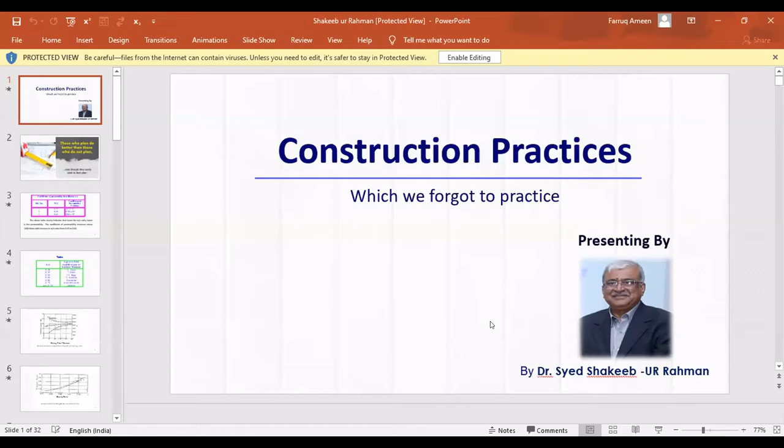So I was just saying, we sometimes plan. Those who plan certainly do better than those who do not plan. And most of the time, even though we plan, we do not stick to our own planning. So friends, let me start with the concrete.

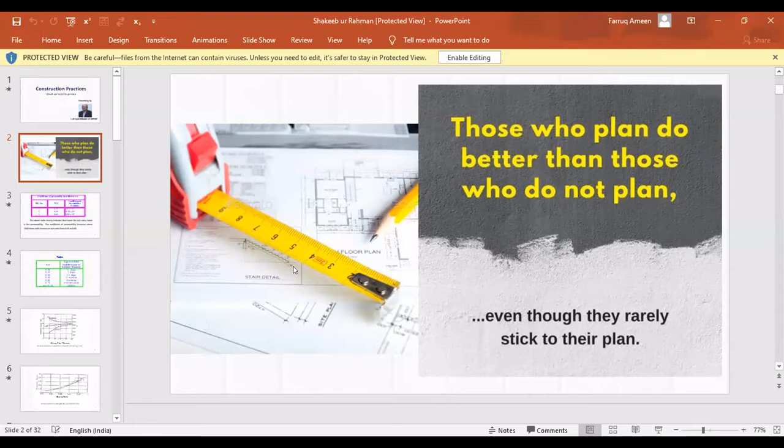See, generally, concrete is referred to as M15 grade of concrete, M20 grade of concrete, M25 grade of concrete, M30 grade of concrete, and so on. The grade of concrete can go even beyond 100 grade. So I will be mostly sticking to the normal grade of concrete we adopt in practice. And my lecture is for the constructions which may not have a quality supervisor.

It can be our own buildings where we may not have a technical supervisor to supervise the construction. In such a case, what precautions we should be taking so that finally we end up with a quality construction, without or with minimum problems later on during its service period.

Friends, we refer to, as I said, say an M15 grade of concrete, M20 grade of concrete, etc. And then we also say it is 1:2:4 concrete, 1:1.5:3 concrete. So that means, we adhere to what is 1:2:4 concrete. It is 1 part of cement to 2 parts of sand to 4 parts of jelly, which refers to M15 grade of concrete. This M15 grade of concrete was considered as a structural concrete up to the year 2000,

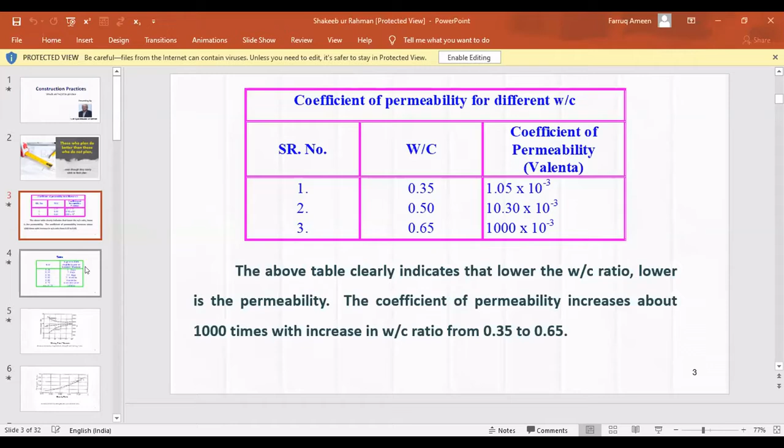In fact, a good practice is to go for a design mix with weigh batching. But in 90 to 95% of our construction, we do not go for weigh batching, we go for volumetric batching. It's fine. There is absolutely no problem. We can still go by volumetric batching. So now when I say that M20 grade of concrete is 1:1.5:3, I am only specifying the ingredients: 1 part cement, 1.5 parts sand, and 3 parts of coarse aggregate, that is jelly.

But I want to emphasize at this point of time that these are not the only 3 ingredients going into concrete. There is another, fourth, very important, underline fourth very important ingredient, which is water. Now, in our proportions, we have just not bothered to mention how much quantity of water should be going into mixing of the concrete. So when we say 1:1.5:3, the amount of water is not generally expressed.

The quantity of water that has to go into concrete plays a very significant role. The more water than required, the strength ultimately will be less. Then the concrete can lead to a very porous concrete, where the pores will be left without getting filled up on their own. And therefore, I want to explain the importance of the quantity of water which should be mixed with concrete. Now, for that matter, there is a term which we call the water cement ratio, W/C ratio.

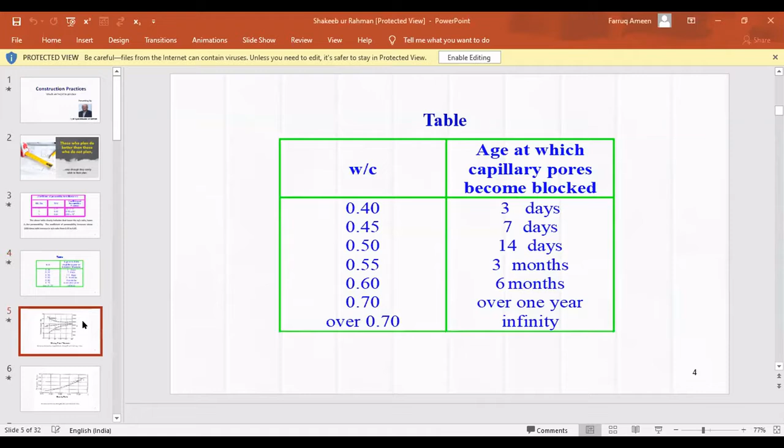For the same ingredients, if this mixing time is not properly maintained, then we can see variations in the grade of concrete. For example, here is the mixing time in seconds. If we mix for about 90 to 100 seconds, say 1.5 minutes, after the last part of the ingredient has gone into the mixer, then we get a very consistent and good quality concrete. Supposing the drum is rotated only for about 30 to 50 seconds and then unloaded, then in the same bulk of concrete, we may have some parts showing very high strength and some parts very low strength. That means the concrete we get is not consistent in strength.

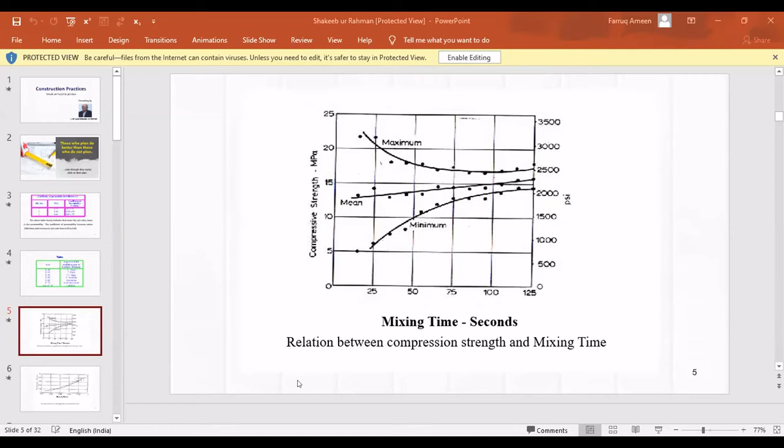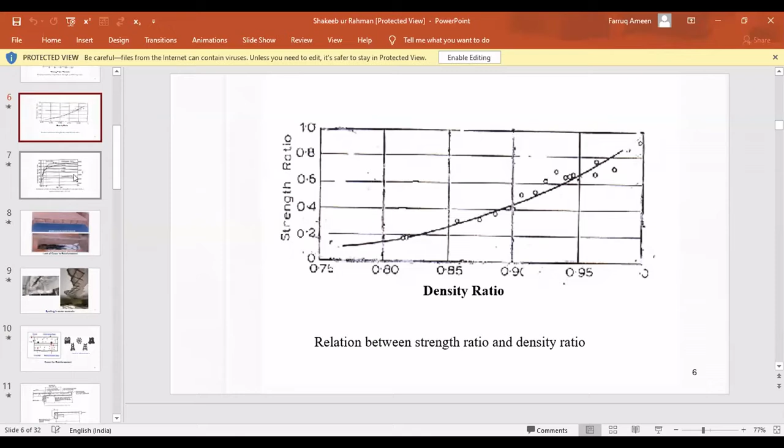Next slide, please. Yeah. So once we place the concrete, here I want to tell you one thing. See, when you are placing the concrete, remember there is already reinforcement placed in position. And before placing the concrete, you should make sure that there is proper cover below the steel for the concrete to go and sit. I will be showing you in my next slides what will happen if you do not maintain a proper cover. Cover should be proper. There are values. For example, in a slab, we should have a minimum of 3/4 inch cover. In columns and beams, we should have a minimum of 1 inch cover, and so on.

This cover should be properly maintained. And the concrete that should be going in the cover should be very, very dense. I'm going to explain to you in my next few slides what happens if we do not have a good, dense concrete cover below the reinforcement. So after taking care, we lay the concrete, we leave the concrete to set. And now the question is, when should we start curing our concrete? This is a very important question. And I will simply say there is nothing like a thumb rule for you to say that you start curing now. You should, after laying the concrete, be observing.

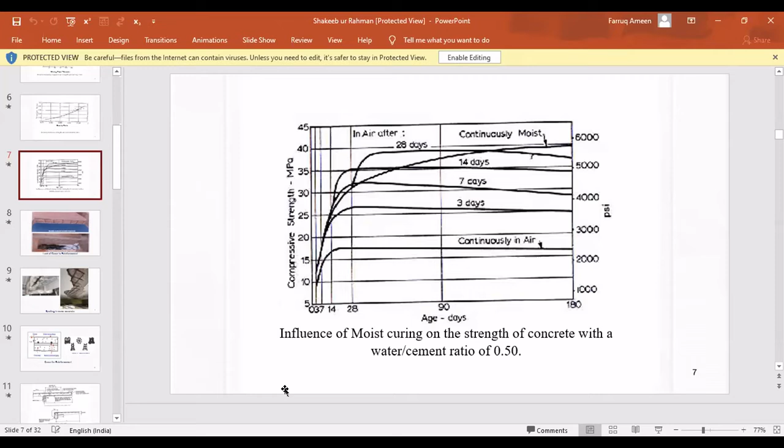Yes, I was telling you about the cover, the amount of cover, and also the quality of cover. I said, for slab, at least about 3/4 of an inch cover should be there. For lintels, another 3/4 of an inch to 1 inch cover should be there. For beams and columns, minimum cover should be 1 inch, and so on. And the quality of cover should be sufficiently dense. Otherwise, what happens is what you see here.

At this point of time, I always remember, our civil engineering group, some of our civil engineers and practicing engineers here who are present. I see Farruq Ameen. Yeah, some will appreciate my point. I always remember one late, great engineer, Dr. C.S. Vishwanath. He used to tell one thing. Maybe, if you permit me, I will tell that example in Urdu, which you will enjoy.

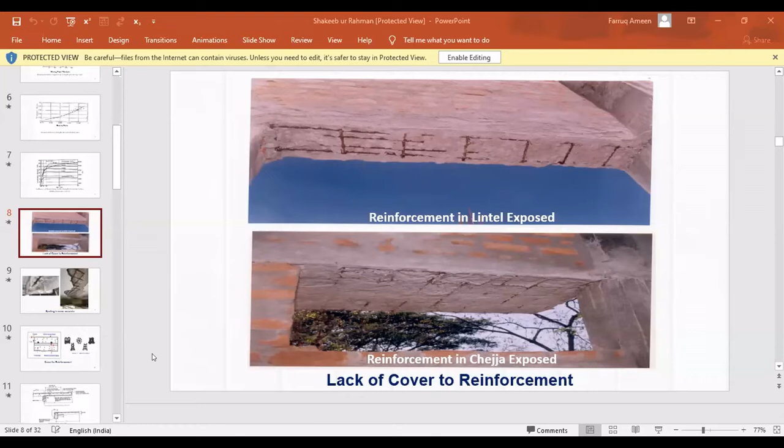So friends, here again, I want to emphasize two things. Before placing the concrete on the reinforcement, we should ensure that the reinforcement has a cover. I will show you some cover blocks. They are all available in the market. They should be brought and kept below the reinforcement before the concrete is poured in. Yeah, next slide, please.

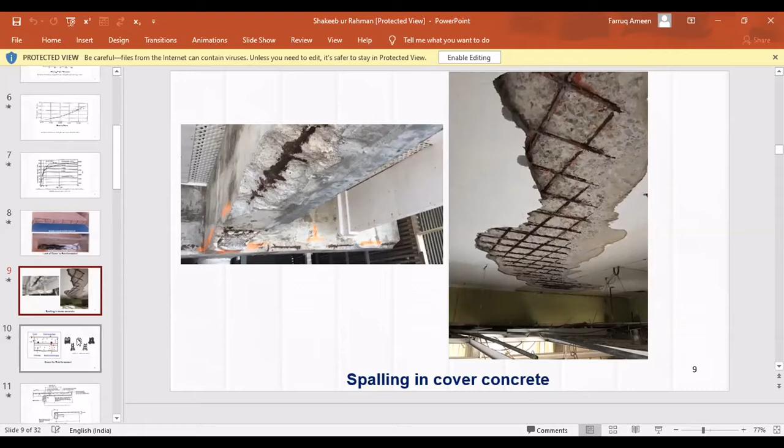Yeah, you see, these are some of the pictures. This is the spalling of the cover concrete. This will happen if the quality of cover concrete is not proper. Yeah, next slide, please. So in order to avoid that, first of all, our concrete should be a quality concrete. Number two, cover blocks for reinforcement are available in the market. So before we pour concrete, we should ensure that the cover blocks are placed and they are not disturbed.

Friends, the main problem is this. Even if there is technical support on site, and our technical person visits the site a day before the concreting, he may be totally satisfied and say that yes, the reinforcement has been placed, proper cover has been placed, etc. But that is not enough. At the time of casting the concrete, there will be a lot of movement on the reinforcement, and that may disturb the cover which you have given. So extra care should be taken at the time of placing concrete to see that the cover blocks which were placed a day before remain in position during concreting. These are all very simple things, we should only remember and adopt in practice. Yes, next slide, please.

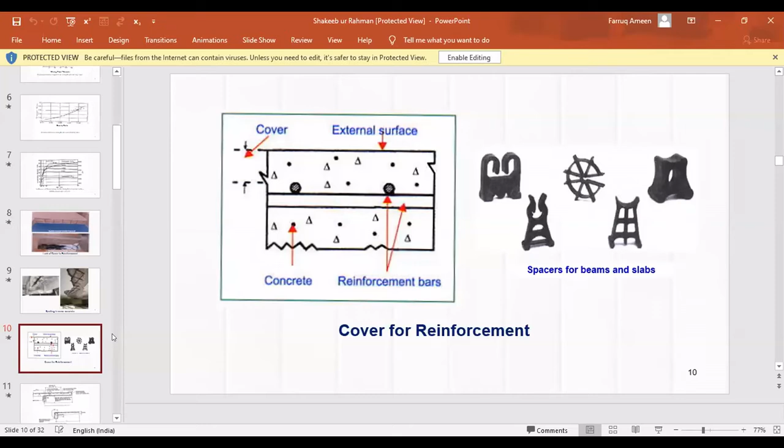Yes. Now I am coming to the reinforcement. See, there is a saying, which may not in fact be correct in many cases. There is a tendency in construction to steal cement, but nobody steals the steel. You got my point? There is some tendency of reducing the quantity of cement at the time of mixing and saving cement, etc. But in general, I will say in 90% of constructions, the steel we normally provide will be more than the required quantity of steel if you go by design.

And more than the quantity of steel, what is important is the detailing part of steel. By detailing, I refer to how steel should be placed before it is embedded into the concrete. Placing of steel is referred to as detailing of steel. I will give you a simple example here. The simplest structural element in a building is a Chejja, which can be about 1.5 feet to 2 feet in width. Now, how do we place reinforcement in a Chejja? This is how we should be placing the reinforcement in a Chejja.

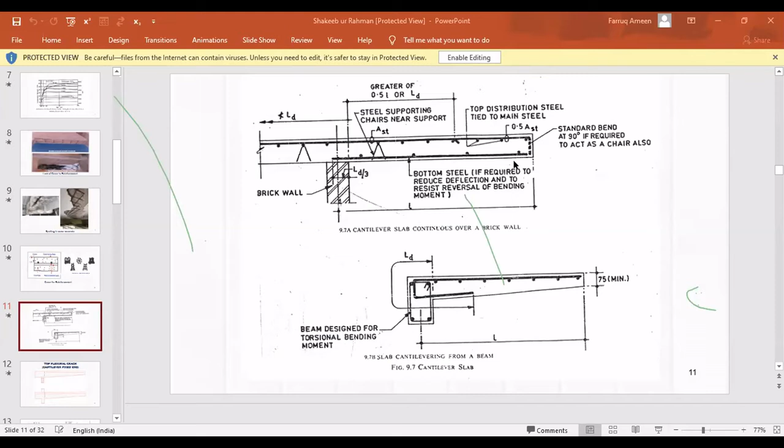Mr. Mobin, can you mute, please? Hello. Mr. Mobin, can you mute your microphone? Please continue, Dr. Saab. Next slide, please. Excuse me, sir, there's an option that you can mute all the participants, and then you can proceed. Yes, that is better, I think, because there's a lot of disturbance. Please continue. I have muted all the participants, but they are unmuting themselves. Okay, good.

Now, you see, this is what I was telling. If there is a cantilever portion, the reinforcement should be at the top, and concrete should be at the bottom. If you do not do this, then you see the kind of crack shown here at the fixed end of the cantilever. It is bound to crack if the reinforcement is not at the top. It is very simple. Consider this as the cantilever. When loads come on the cantilever, it bends like this. Where is the tension and where is the compression? The tension is at the top, and therefore the reinforcement, to cater to the tension, should be at the top. If by mistake it is laid at the bottom, the tension will be in the concrete portion. Concrete is weak in tension, and therefore the concrete cracks here.

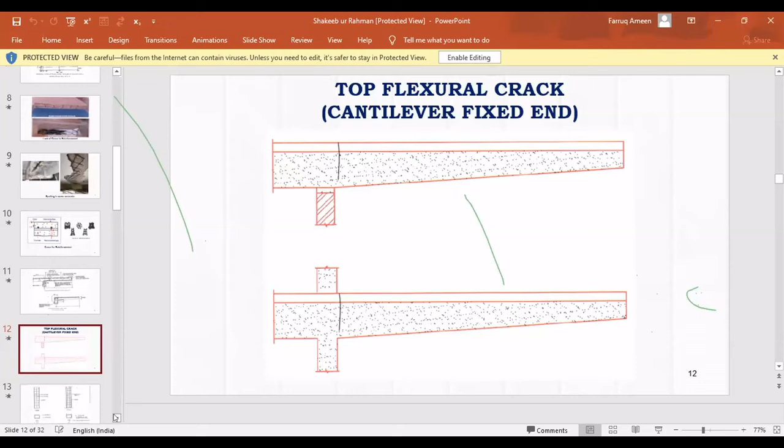Next slide, please. Yes.

Friends, about 10, 15 years back, we used to get only one grade of steel in the market. Now it is very common. We have Fe40, that means 40 grade of steel, 50 grade, and also 55 grade of steel. We must be aware that there are different grades of steel available in the market. My point is, whatever grade of steel you have used in the beginning, you should continue to use the same grade till that structural element is completed. For example, if the columns were started with Fe40 grade of steel, then complete the building only with Fe40. If there is an extension of the building, you can change the grade of steel. There is no problem. But in one particular structural element, it is not a good practice to mix different grades of steel.

Sometimes, you should not think that for the main reinforcement I can go for a higher grade of steel, and for the minor reinforcement in the form of stirrups, etc., a lower grade of steel. No, don't do that also. In one element, the grade of steel should be the same. Now, let me tell you, about 10 years back, there used to be a lot of price difference between Fe40 grade of steel and Fe50 grade of steel. Now the difference is not there.

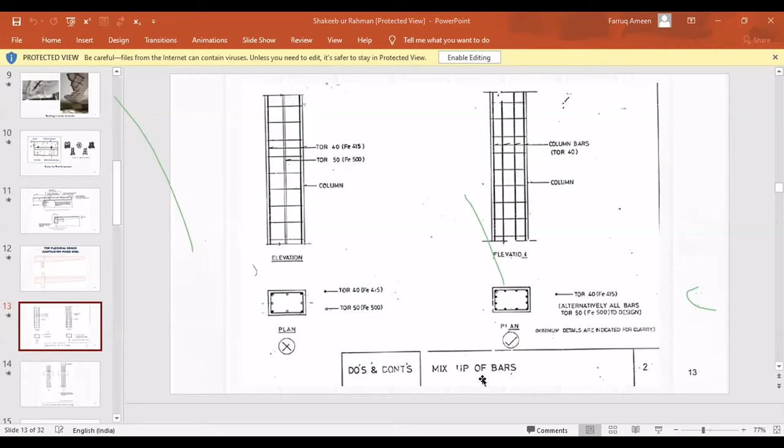Maybe a time will come in future very soon when you will find only Fe50 and Fe55 grade of steel in market. There may not be any Fe40 grade of steel. Now, at the moment, the price difference between a 40 grade of steel and 50 grade of steel is not appreciable. And therefore, if you so desire, you can always go for a higher grade of steel. And by adopting higher grade of steel, there is saving in the cost of steel to an extent of 10 to 15%, depending upon whether your member is a flexural member or a compression member. Yes, next slide, please.

Yes, see another important aspect. I told you in the beginning, I'm not going to show you anything which we are not practicing. Sometimes we forget to practice. Okay, you should always remember. See, at the roof level, there is a beam column junction. There is a column, there is a beam, there is a slab. Okay, and the column rods will have to come. And the column rod should not be stopped at the roof level. It should go above that roof if there is further extension of the building. And the rods, as far as possible, should be staggered. They should not be of the same length, which extends above.

Now, if this is not done, by any chance, if all the rods are cut above the roof level, but they are all cut at different levels, then it is not a very big issue. What you should be doing is, in such a case, you will be placing that stirrup at a distance of, say, about 8 inches center to center. On the other hand, if just above the junction all the rods are cut at the same level, then you reduce the spacing of these stirrups to 1/2. This is not a good practice, but still if you have done it, then reduce the spacing of the stirrups to 1/2, that is 4 inches center to center. Yeah. Next slide, please.

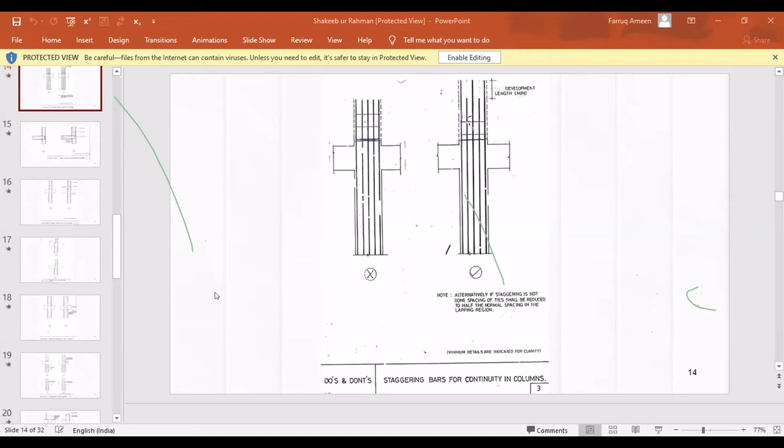Yes. See, these beam column junctions are very important. As I told you, number one, you should not stop the bars to get cut at the roof level. By doing so, what will happen? You will have to start lapping the bars from the junction. Now, if you do so, there will be a lot of congestion of steel there, and you cannot pour concrete and compact that concrete properly. See the importance, I will be taking you through the importance of a good quality concrete and proper detailing at the junctions, particularly when there are some heavy wind loads or earthquake loads. During wind loads and earthquake loads, generally the structure fails at joints like this. Therefore, a joint should be properly detailed before concrete is poured.

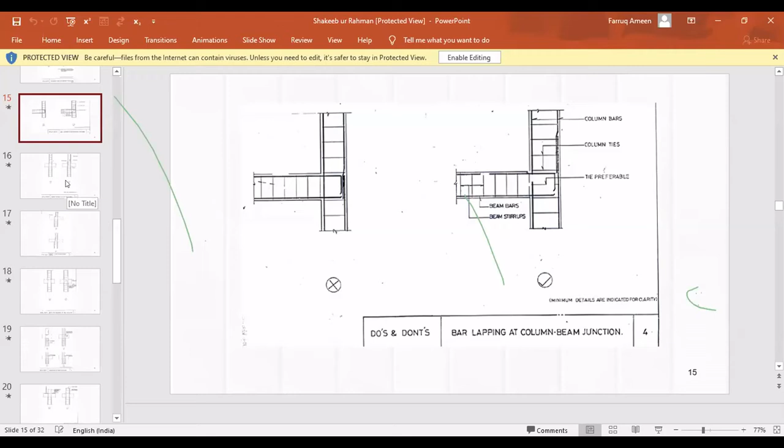And next slide, I will show you. So here, what I want to say is, when you are projecting your bars, see that the bars in one particular story will not stop at the beam column junction. They should go above the beam column junction for a minimum length of 50 times the diameter of the bar, so that for the next story, the rods will be lapped within that development length, which is 50 times to 60 times the diameter. Or even, you can project those rods for about half the height of the story or whatever.

Yes. Now, sometimes, in multi-story buildings, we will have to change the size of the column, because for a 5-story, 6-story, 8-story buildings, maybe first 2-3 stories, we may maintain a certain size of the column. And because as we go above, as the load considerably gets reduced, then sometimes we may think of reducing the column size, or it can be for some other practical purpose also. That is permitted. You see, the column size in one floor can be something, and in another floor or subsequent floors, the column size can be reduced. It is permitted by code. By codal practice, it is permitted.

But when you intend to do that, you should have a plan. What is that plan you should have? You have a certain size of the column below. You have decided about a certain other size above. Therefore, for this size, you cut the stirrups for that particular size of the column, and then have them. Then for the reduced column size, you reduce the size of the stirrups, keep it ready, and then from the bottom of this beam column junction or the slab level, you should kink the bar from the bottom of the slab gradually and take it above, and then place the stirrups and place the rods in position, and then only concrete this beam column junction and the slab.

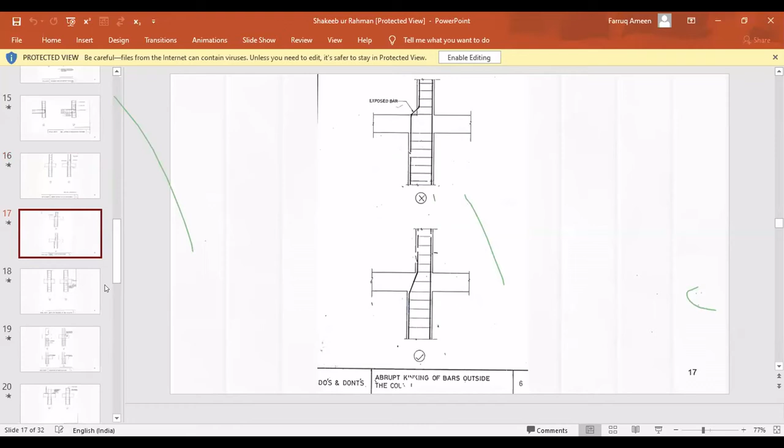Yes, I was telling you that whenever there is a lateral load, maybe due to wind, maybe due to earthquake or whatever, your beam column junction plays a very important role. We have seen some pictures after failure of structures. For example, in 2001 or so, which I'm going to show you some slides of also, there was a very serious earthquake in Gujarat, and so many multi-storied buildings collapsed.

We found that the buildings which were designed with excessive reinforcement than required, but with improper detailing, failed. But buildings with just sufficient reinforcement, but perfectly detailed, did not fail after the earthquake. They sustained that earthquake. It is because the joints there were perfectly designed and detailed.

Now generally what happens is, the problem is, whether we want or not, the labor group, for example, the mason. If you ask the mason, I want stirrups to be provided at the beam column junction, he'll put up a lot of resistance. He says, no sir, I cannot provide. But you have to make sure that the stirrups are continuous either in the column or in the beam.

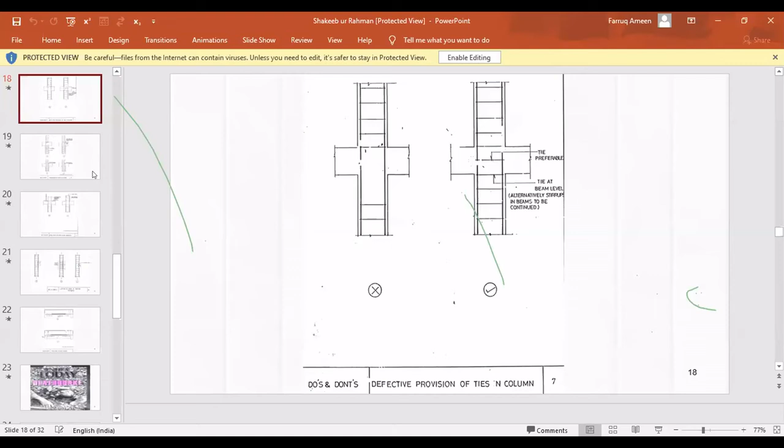Again, this is also about the discontinuity of the rods. Sometimes what happens, we take the building up to a certain number of stories, and then we stop the construction temporarily. And this temporary period can be for a few months, or for a few years, or it can be an indefinite period. Therefore, when we have to stop the construction for whatever period of time, we should see that the rods exposed above the building are properly placed in position.

It is a common practice. We have seen that there will be dummy columns constructed to keep the rods safe there. You should see that even that dummy column will not allow the water to go inside and make the reinforcement corroded. Whatever we have to do, we have to safeguard that reinforcement. If we leave the reinforcement just like that, particularly in public buildings, say in Kalyan Mantaps or even in schools, where children have access to the roof slab, they may play with the reinforcement, and the reinforcement sometimes may not be there at all. This is not something uncommon. This is quite common.

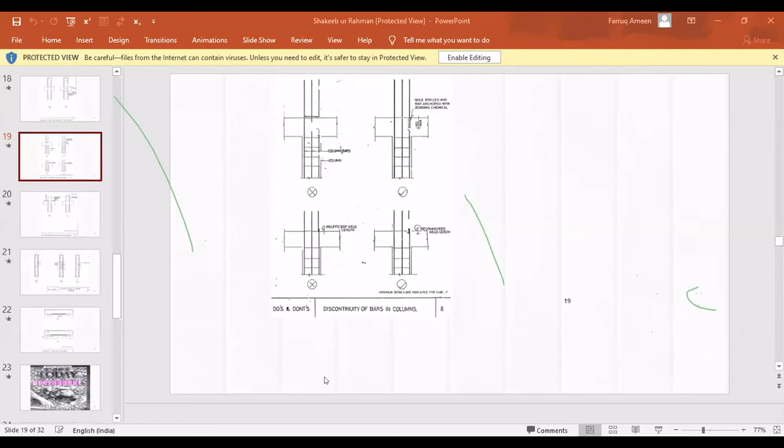Supposing there were 6 rods in the column and 2 are missing. Then what do you do? Because you have already cast that slab. So for that, what we can do is make a small hole there and take the reinforcement from there. And then we have adhesives, and keep this rod, which has been inserted now, completely buried in adhesives, and it's safeguarded. Next. Next slide, please. Yes, next slide.

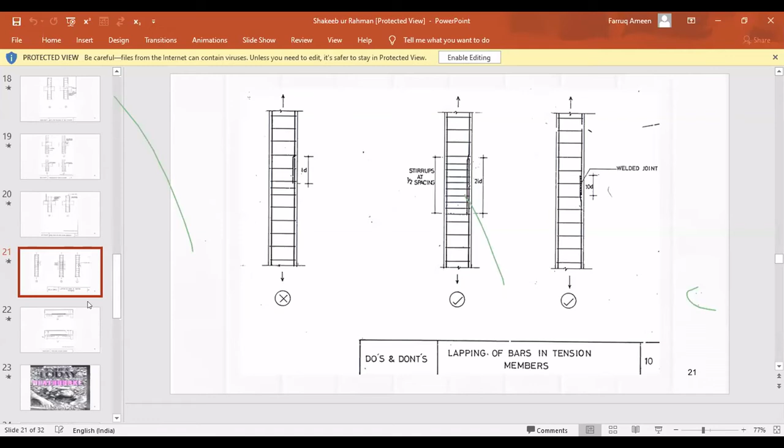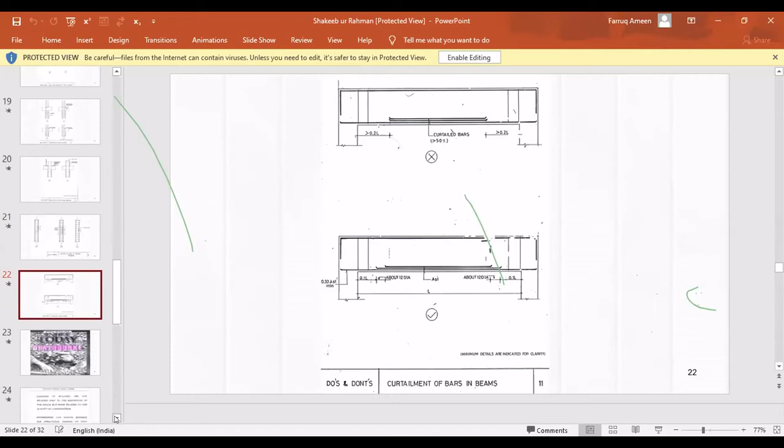Yes. Now in our beam members, it is generally seen that for the size of the cross section of the beam, we may not be in a position to put the complete reinforcement in a single layer of the beam. Then the code permits you to adopt multiple layers, like what we are showing here. So the first layer of reinforcement should be continuous. It should go and support over the columns or the wall, whatever it is. The second row can be curtailed, and the length of the bar in the second row can be 80% of the span. Subsequently, you can further curtail and put the third row of the bars. So when you are putting the bars in different layers, they should be curtailed properly and placed in position.

It should not be that all rods are curtailed at one single point and then placed like this. What will happen compared to this? In this case, there will be a stress concentration at the point where there is only, say, 30% reinforcement to the point where there is 100% reinforcement. In order to avoid that, you should stagger the bars and see that there is no stress concentration at a particular point. Next slide, please.

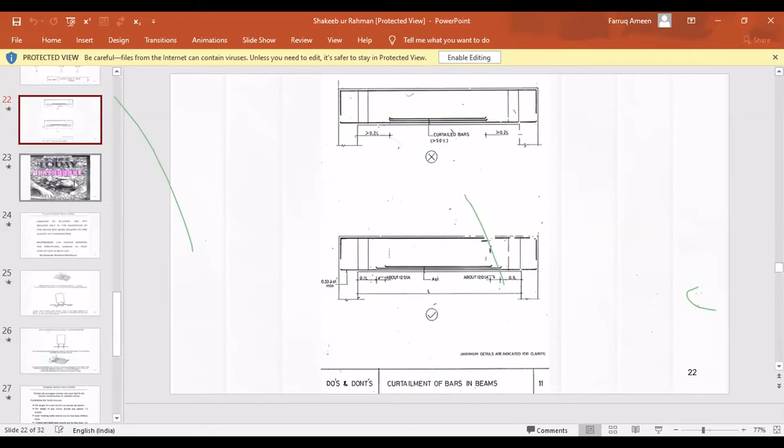Yes. Now I'll very briefly, with the permission of Farruq Ameen Saab, can I take another 10 minutes? Yes, sir. I can't hear you. I will take it as I am permitted. Hello? Hello? Yes, sir. Please continue.

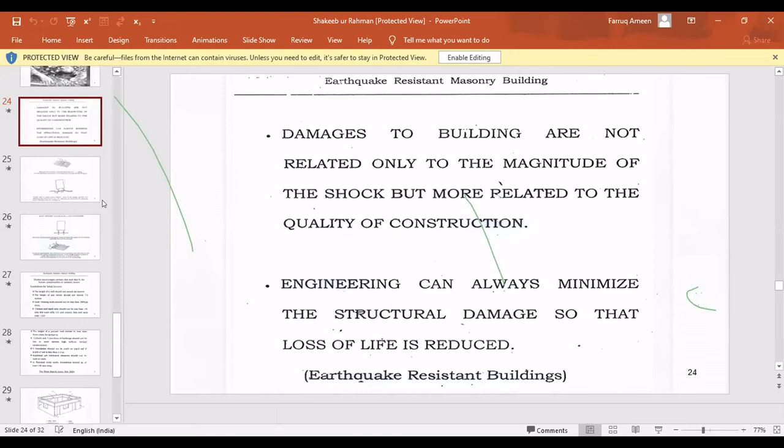I don't remember where I had read. It said an earthquake-resistant building is one which allows the occupants to rush out of the building to see how their building is crashing. Yes, next slide, please. Now, the damages to buildings are not related only to the magnitude of the shock, but more related to the quality of construction. This is what I'm telling you. We should not give any excuses that the building collapsed and so many people died because of the high intensity of earthquake. No. We will be knowing beforehand which areas are prone to what intensity of earthquake. Beforehand we have the information, and therefore when we design a building, we should take care and design the building for that particular region. Engineering can always minimize the structural damage so that the loss of life is reduced. This is what is called earthquake-resistant buildings.

And therefore, buildings in earthquake-prone areas should be designed accordingly. Zones have been divided: earthquake zone 2, zone 3, zone 4. We in Karnataka come under earthquake zone 2. After the 1991 earthquake and the 2001 earthquake, zone 1 was simply scrapped. We started with zone 2. There is no zone 1 now. We have only zone 2, zone 3, zone 4, etc. So we are in zone 2, which is quite a safe zone.

But even in our zone, when we design a multi-story building, we should design considering the earthquake forces which come in zone 2. So this is what happens in the event of an earthquake: due to the horizontal forces induced in the earth, which can lead to collapse of the building or serious cracks in the building depending upon the intensity of the earthquake. Next slide, please.

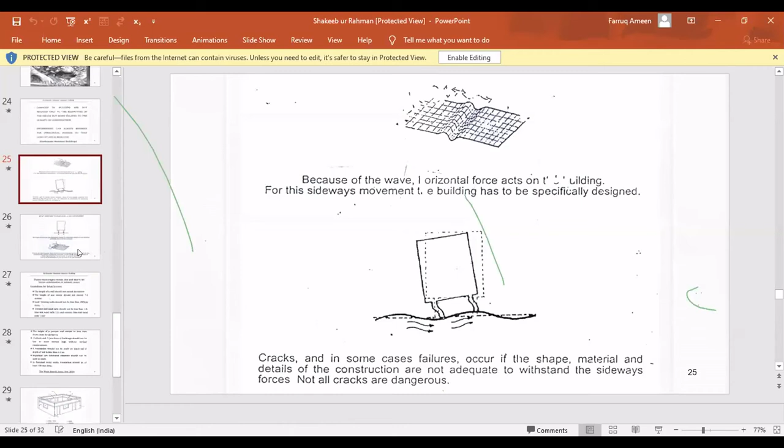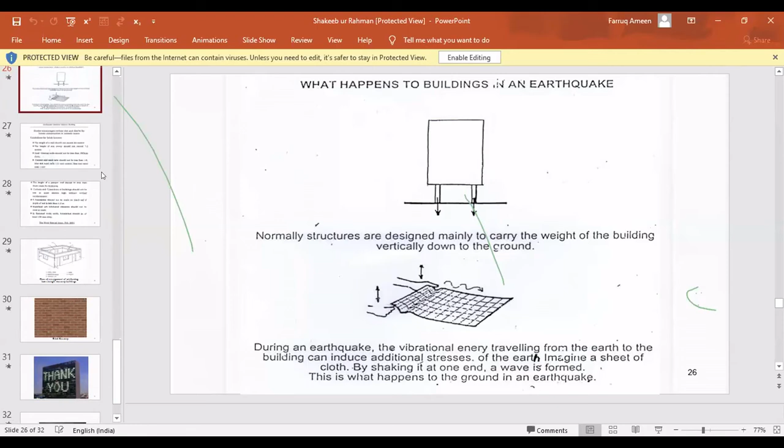Yes. So now, maybe the last slide or so, I'm going to take you through a few guidelines which, again in 2001, HUDCO had given: certain do's and don'ts for house construction in seismic zones. What I want to emphasize with this slide is that there is nothing new which we are not following. Most of the things said there, all of us are following in our masonry structures, in our constructions. But we have to ensure that they are properly done by our construction team. There is nothing new. Almost all the guidelines given there are adopted in our practice.

Therefore, our masonry structures, what we are constructing today, with a little care, can be made earthquake resistant. I'm not going through the multi-storied buildings or the detailing of columns, beams, etc. Now here I'll take you through every point. You can take it as a checklist and mark it if we are following. Almost all the points we are following. There will be 1 or 2 points sometimes we may not be following. And if we follow them henceforth, our masonry structures can all be taken as earthquake resistant structures.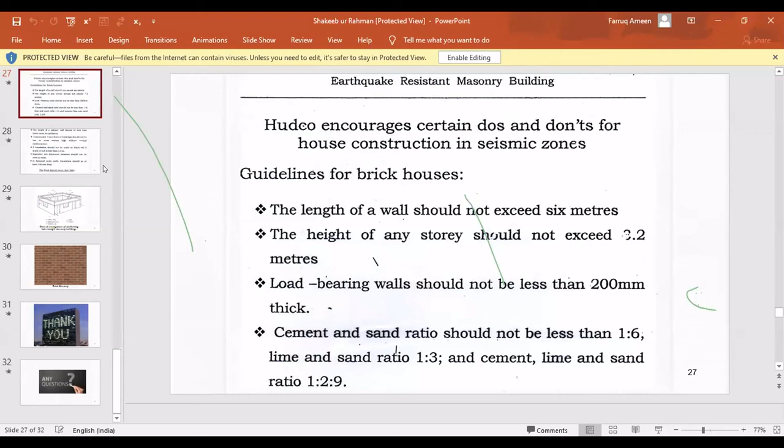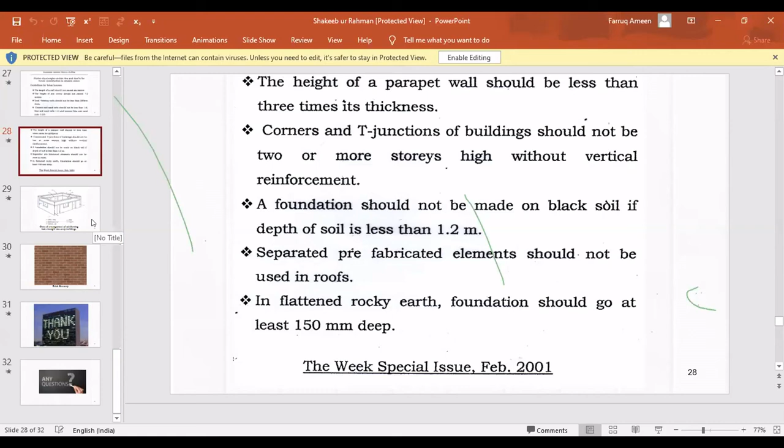Yeah. I think I have come to the end of my lecture. This is the last slide, perhaps.

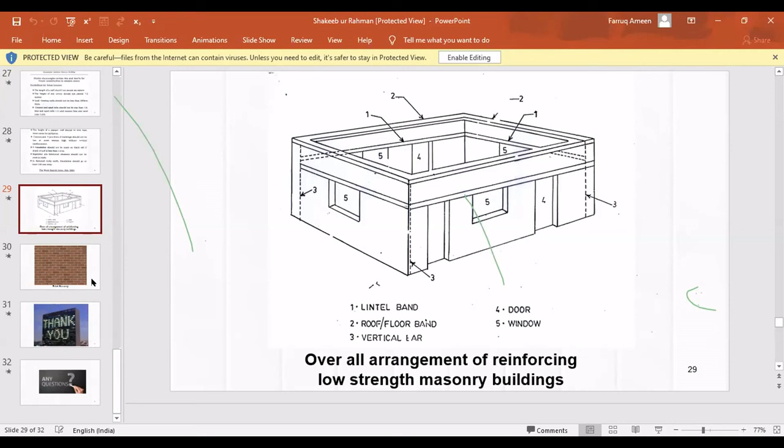I think I have completed my lecture. Yeah. Any questions? So the last one is for the load bearing. Yeah, this last slide. No, before, thank you. I want to show you the last slide. Last slide, please. Okay, sir, fine. I have one question, sir. I'll take a minute or two. The previous slide. What is this?

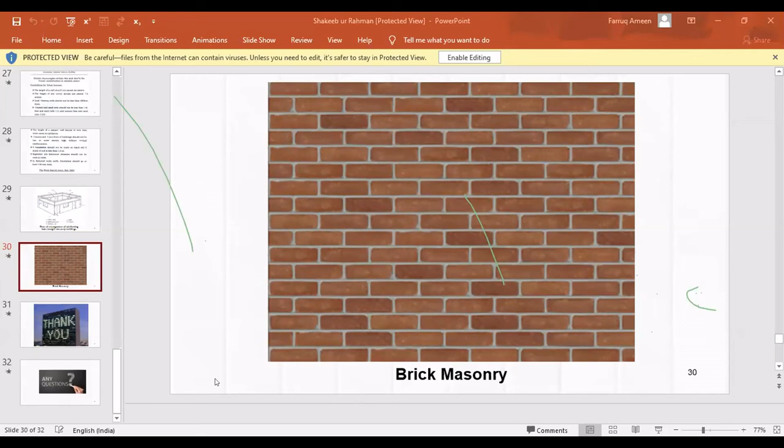Yes, sir. I think I have finished my lecture. Any questions? One question, sir.